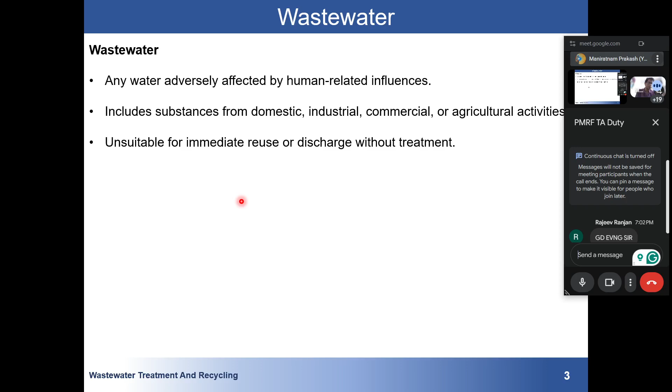So if we have any water that is contaminated from this kind of substance, that will be unsuitable for use, and either we have to treat it or we have to reuse it. That depends on our purpose, what we want to do.

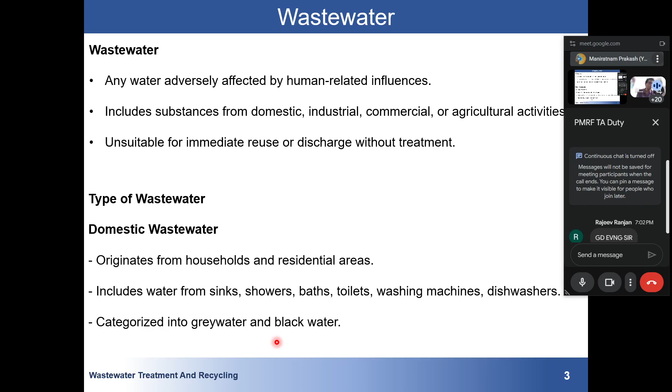Types of wastewater generally come from these sources. First is domestic wastewater, which originates from households and residential areas, including water from sinks, showers, baths, toilets, washing machines, and dishwashers. We categorize domestic wastewater into grey water and black water.

Black water is toilet waste, mainly containing organic carbon, nitrogen, phosphorus, and microorganisms. Grey water contains kitchen waste, bathing, and cleaning waste, mainly containing carbon, nitrogen, phosphorus, surfactants, salt, and dirt. Black water has a high amount of organic carbon, while grey water has a high amount of inorganic carbon also. Domestic water is the combination of both black water and grey water.

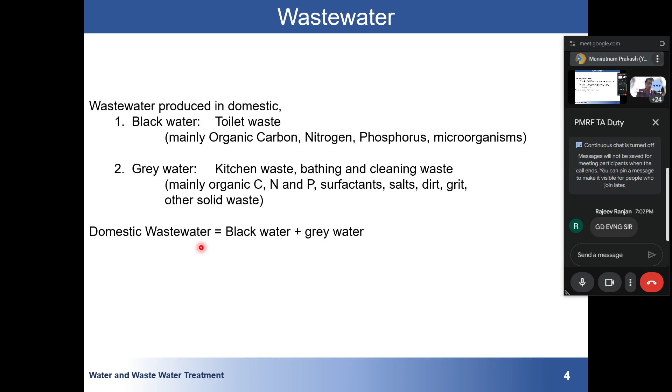These are just recap, so I will be moving on. If you feel I am going a little fast, you can stop me. I will explain in more detail, but these are the basic information - if you have gone through the lecture, you might be aware of these things.

Then we have industrial wastewater, generated from industrial and manufacturing processes. Depending on the type of industry, whether it is leather industry or dye industry, we will have different kinds of contaminants in our water, and that will also be considered wastewater that has to be treated.

Then we have agricultural wastewater, that is related to farming activities.

Then finally we have storm water. When we see lots of rain in our area, due to runoff from precipitation like rain and snow, this also generates wastewater - whatever silt or anything lying on the path of the rain will finally go into the river, canal, or nearby drainage system, and that also generates a kind of wastewater known as stormwater. Depending on the type of wastewater, we have different treatment policies and treatment methods.

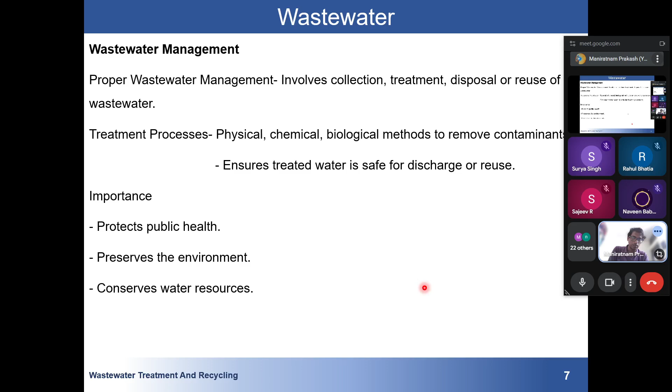So these few slides were about the basic things that have been covered in your lecture. I am hoping that if you are here, you must have gone through the lectures, so these were some basic recap. From the next slide, I will be showing you some questions, and I will give you very small time.

Inorganic carbon - so organic carbon, you know, can be easily degraded into some other form, while inorganic carbon remains. If you look at the basic difference scientifically, if carbon is in the oxidation state of plus 4, that will be considered inorganic carbon.

Are you getting what I am saying? Carbon has many oxidation states. If you look at the oxidation state of carbon, it can go from minus 4 to plus 4. So if you see any carbon...

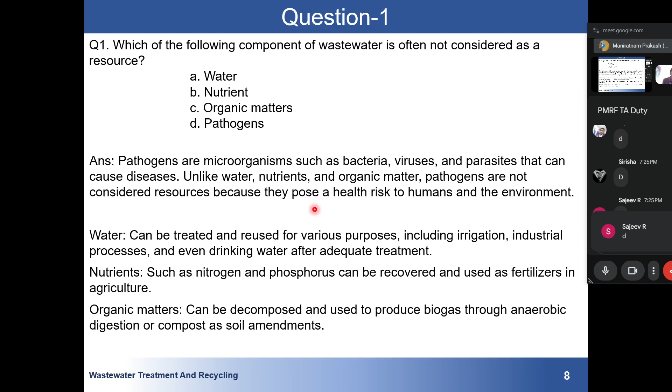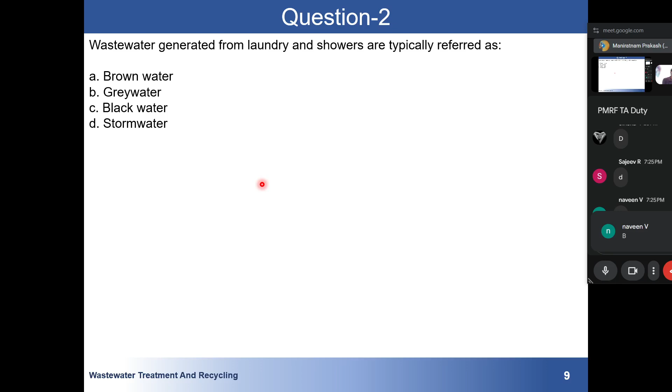Okay. Similarly, wastewater generated from laundry and showers is typically referred to as grey water. Yeah, yeah. So there is nothing called brown water in our system. Grey water comes from sources like laundry and showers.

So generally, remember one more thing: grey water and black water are also distinguished because of the carbon. Generally, grey water will contain a high amount of inorganic carbon, and black water will contain a high amount of organic carbon. The toilet waste, fecal matter, contains a high amount of...

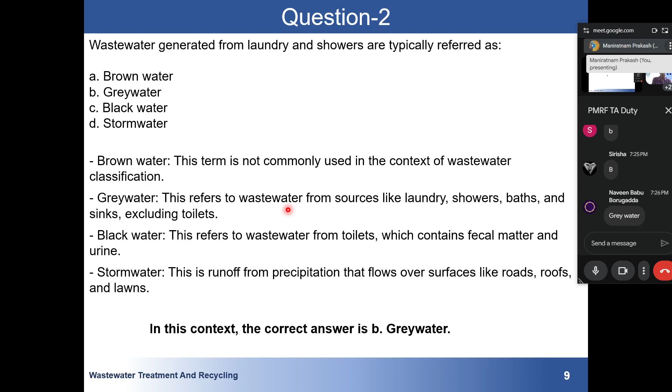I hope everyone is aware of different types of sources. We have point sources - meaning the wastewater is being generated at a particular point, such as industrial effluent, sewage treatment, or oil spill from a tanker. So that will be a point source. We can identify that source and treat it at that location only.

So we have non-point source, where you don't know the particular source. Generally, if you want to treat the point source, we can treat it easily because we know the source, we can directly go there, collect the water and treat it. But for non-point source, the treatment process is a bit challenging because you have to collect water from a very large area, like urban runoff, agricultural runoff, or atmospheric deposition. These pollutants come from a vast area, so the point of collection itself becomes very challenging, and that's why treatment also becomes challenging. But for point source, we know where the water is coming from, so we can directly go there and treat it.

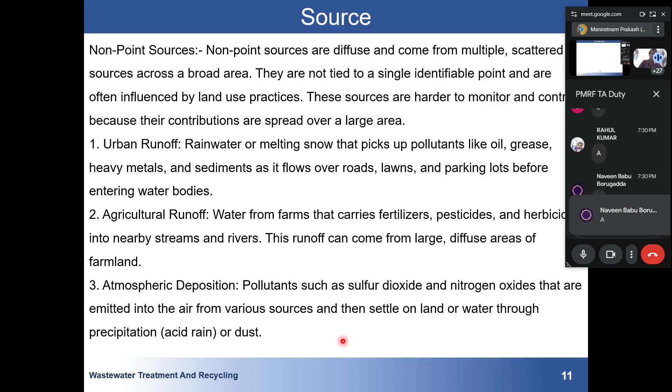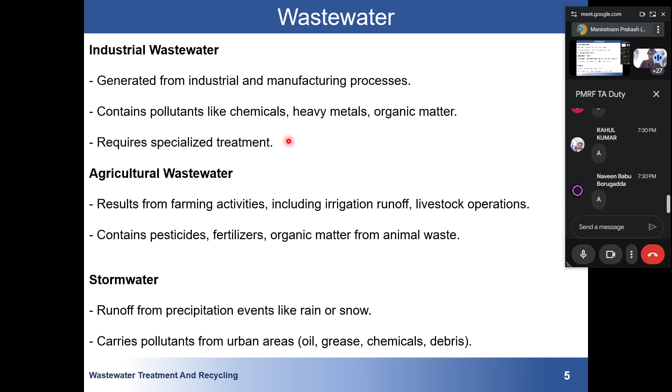So, regarding hazardous waste, if you talk about the management of hazardous waste, even your domestic water can be very hazardous, containing some hazardous components. Your industrial waste too—hazardous waste is a combination of many things. There is a separate topic on how to manage hazardous waste; it's a topic in itself, you cannot just list it here. So I have listed some waste here, like agricultural waste, storm water waste, industrial waste, and everything. But hazardous waste depends on what different components are in that wastewater. Depending on that, we decide whether it is hazardous waste or not, and the treatment is done based on that. So there is a separate course on hazardous waste.

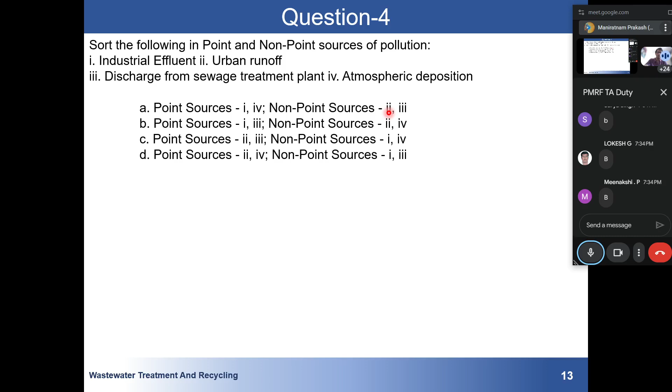We have option B. I think there are 24-26 people here, so I want everyone to participate. So B—first and third ones are point sources. If you have gone through the discussion, I pointed out that atmospheric deposition, like SO2 and NO2 coming into the water, is non-point. So yes, the correct answer is B.

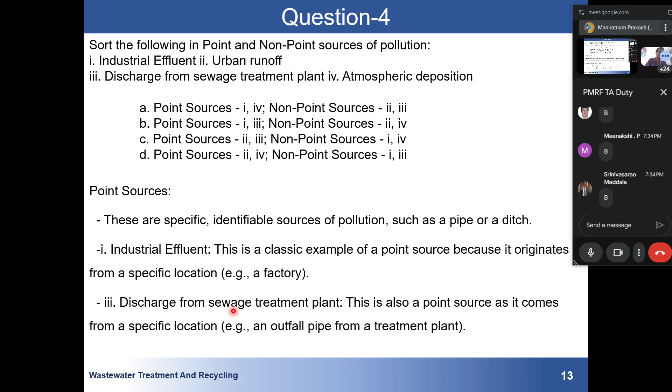Industrial effluent is the classical example—something coming from a factory, or something coming from the discharge treatment, that will be a point source. So whenever you look at point source and non-point source, think about the treatment also. The correct answer for non-point source is B.

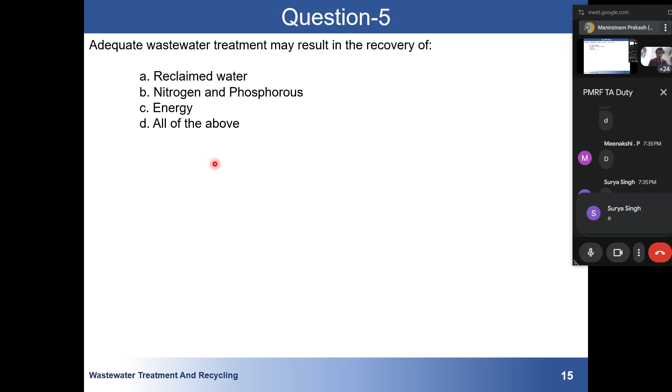Adequate wastewater treatment may result in the recovery of... All of the above. Option D is correct—all of the above.

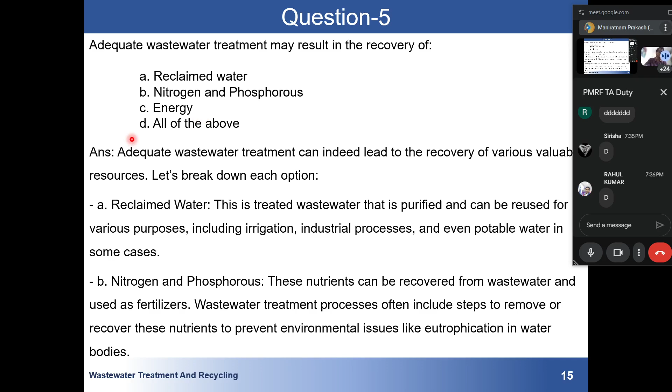We can reclaim the water, we can reclaim nitrogen and phosphorus, and we can reclaim energy also. If you want more detail on each option, you can go through the PPT. But briefly: we have to reuse our water, so we can reclaim the water. Many studies are going on for how to recover nitrogen and phosphorus, because these are reused for other things. And finally, wastewater contains sludge, which can be used to produce energy. So the correct answer is D, all of the above. The PPT will be shared with you.

How can sludge produce energy? Sludge is converted—basically it provides biogas which is used as energy. So sludge is converted, there is a mechanism where sludge is subjected to anaerobic digestion, and then that is converted into methane, and methane is used for energy. I think either in week 5 or week 6 we will go through sludge management, where it will be taught how this sludge is getting converted. For now, just remember the sludge is subjected to anaerobic digestion, then converted into methane, and methane is used for energy.

See the PPT. Someone asked, have you worked related to industrial wastewater in the past? Yes, last year I was the TA of industrial wastewater. So if you are asking about that, yes, I have taken the course of industrial wastewater also.

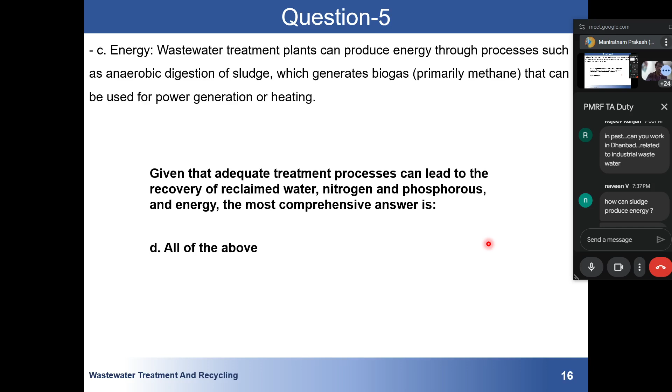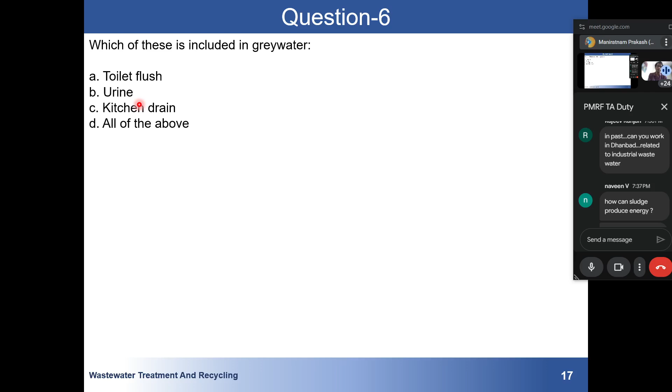Coming to the sixth question: which of these is included in gray water? You have to think about it—kitchen drain, option C. Whenever it comes to gray water and black water, I always think about the amount of organic carbon, and check which one will contain how much. The correct answer is C, because toilet water is considered black water, and urine is also considered black water. Kitchen drain includes wastewater from washing dishes and food preparation, so the correct answer is C.

Fecal matter will be considered as black water. It is part of black water—this water is considered black water because it contains fecal matter and urine. Yeah, you are correct.

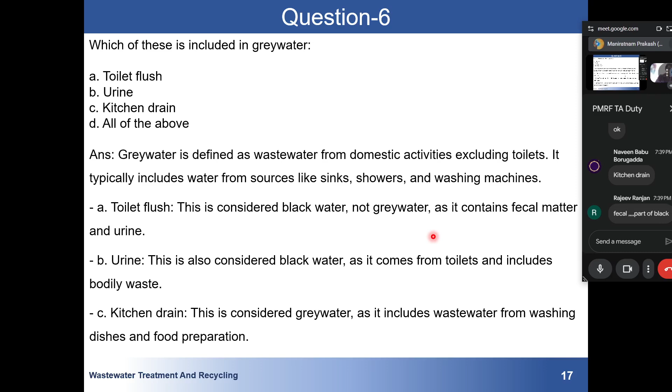Due to harmful pathogens and high carbon content, fecal material, also called human excreta, is considered part of black water. Some books use the term fecal material, others use human excreta—both mean the same thing. It's coming from the bathroom. I hope this is clear to you—Naveen Babu, you asked what fecal material is.

Some books use the term fecal material, some use excreta. Both are the same thing.

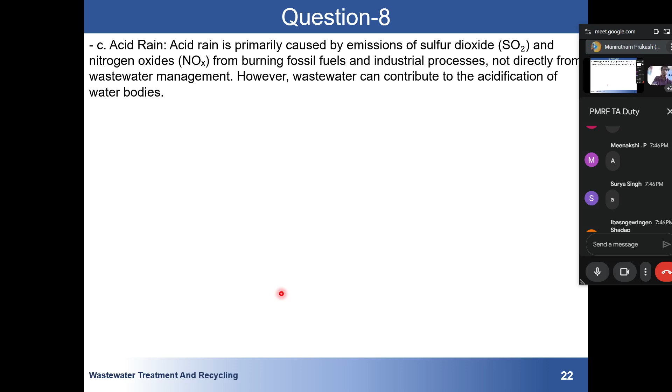First you should know what is eutrophication. It's like growth of algae due to some kind of nutrient, generally nitrogen and phosphorus, and wastewater contains high amounts of nitrogen and phosphorus. If that is not treated, it will cause eutrophication, but it cannot cause climate change. Anything can cause climate change, but wastewater can contribute to greenhouse gas emissions like methane, and climate change is more broadly related to a variety of sources, not directly. So it's not that wastewater is directly related to climate change, and it's also not related to acid rain. So the correct answer will be A, that is eutrophication.

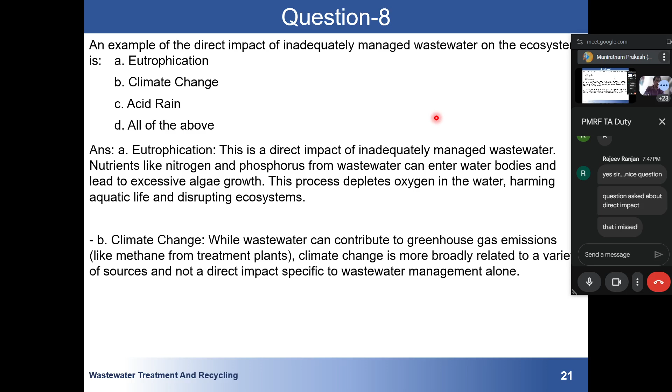The question was about direct impact. Like eutrophication will be, if you just discharge your wastewater, it will cause eutrophication. Okay, coming to the ninth question: which of the following is not a technique for wastewater treatment?

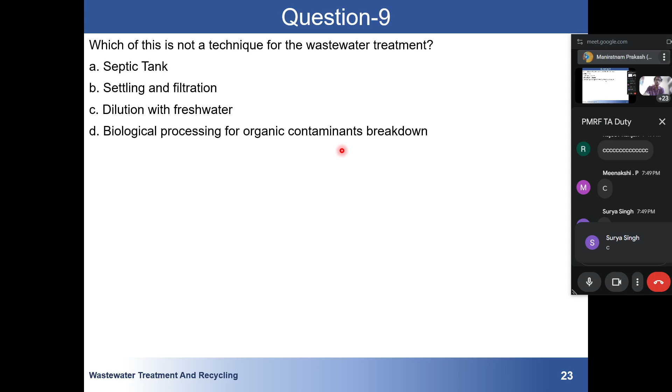Dilution with fresh water. Whatever questions till this are basic questions, we will be reading about these things in more detail in the upcoming week. So the correct answer is C, dilution with the fresh water.

There is a septic tank, which is a commonly used method for treating wastewater, especially in rural areas. It involves separation of solid and liquid, with microbial activity breaking down the organic matter, filtration, and settling. We will read about this sedimentation in detail in the upcoming week.

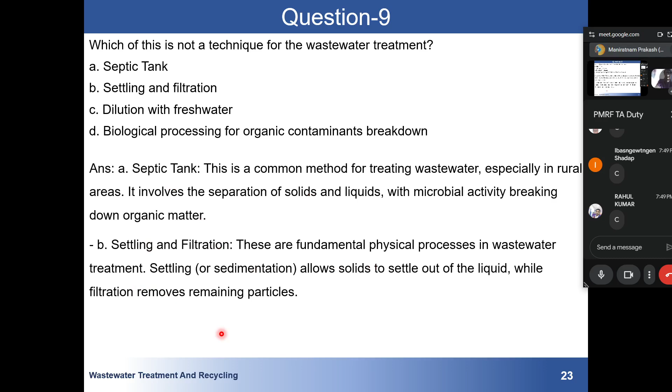Then we have biological process for organic contaminants. This is the key technique in wastewater treatment. We will be discussing biological treatment again, I think in week 7 or 8.

The dilution with fresh water is not generally a treatment technique but rather a method to reduce the concentration of pollutants. Generally, if any industrial wastewater contains a high amount of pollutant, people dilute their wastewater to decrease the pollutant concentration. But this is not related to wastewater treatment, so the correct answer is C.

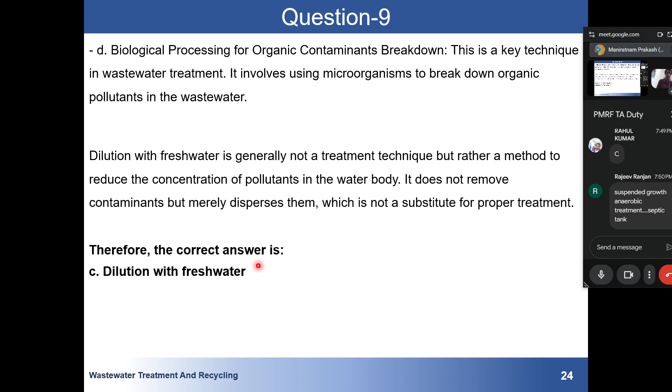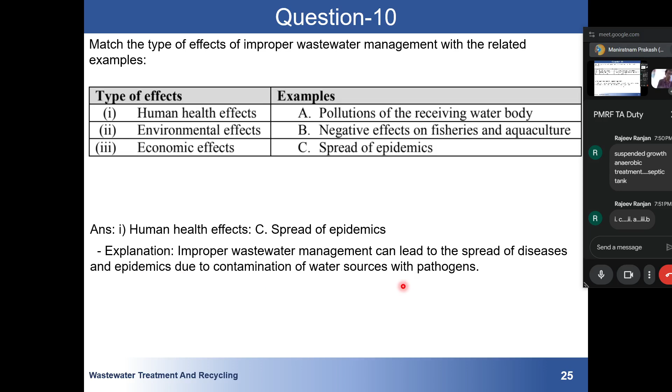Negative impact on fishery, environmental spread of epidemics. First will be matching with C: improper wastewater can lead to spread of disease and epidemics due to contamination of water bodies with pathogens. Then second will be matching with A: environmental effect includes pollution of water bodies which can harm aquatic ecosystems and biodiversity. And lastly, we have economic effect: negative impact on fishery and aquaculture, which can suffer from pollution-related issues affecting fish health and water quality. So the correct answer is 1C, 2A, and third B.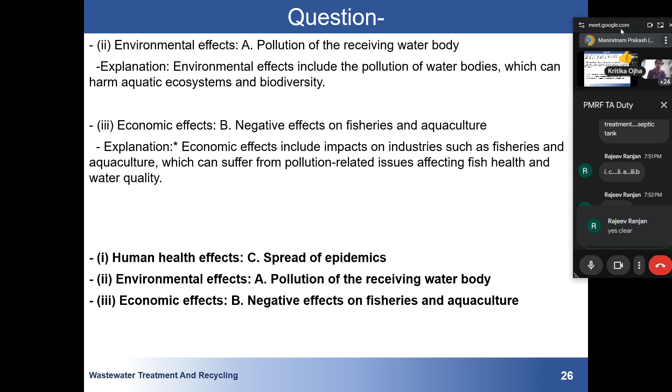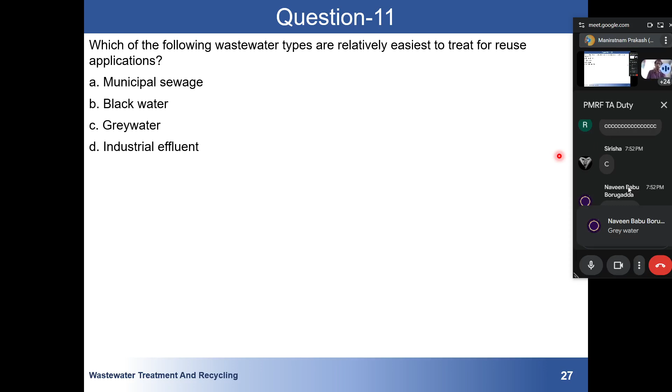Which of the following wastewater types are relatively easiest to treat for reuse application? Options are municipal sewage, black water, grey water, or industrial effluent. Someone has said municipal sewage, grey water - okay, everyone is saying grey water. Yes, the correct answer is grey water, because here I have also noted out the reason.

Municipal sewage contains a mixture of grey water and black water, making it complex and very hard to treat. Black water comes from toilets and contains high levels of pathogens and organic matter, making it difficult and costly to treat. Grey water includes water from sinks, showers, and washing machines, which generally has a lower level of contamination compared to black water, and it is easier to treat and can be used for applications like irrigation and toilet flushing. Industrial effluent contains a high amount of pollutants, so it is hard to treat. So grey water is the type.

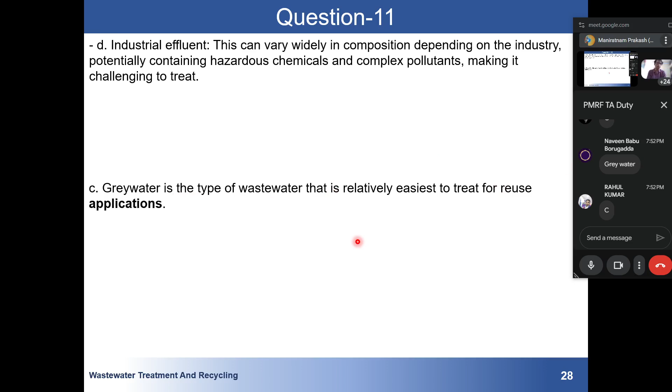Yes, everyone who said that grey water is very hard - it's actually very easy to treat.

Again, which of the following is the more adequate example of wastewater reuse in the environmental sector? Answer this question. Option A is discharge of treated sewage to agricultural field.

I have got two answers, A and C.

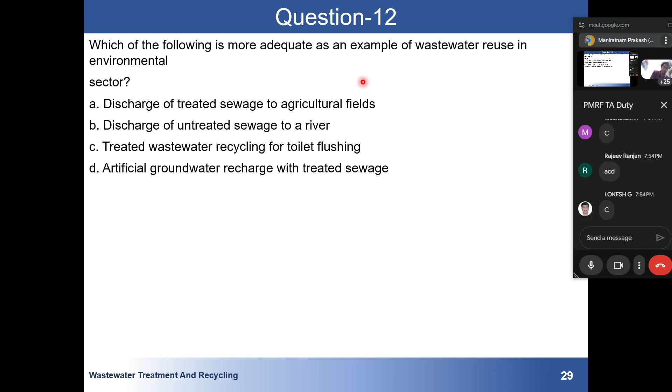Okay, so the correct answer is C.

Sorry, the correct answer, the best answer is D, artificial ground recharge with treated sewage.

No one has said D. I don't know why everyone is saying C. The correct answer is D. No one has said D. Only one person has said ACD, but you have to choose one. So I will go through one by one.

So in the environmental sector, wastewater uses, we have like... just 1 minute.

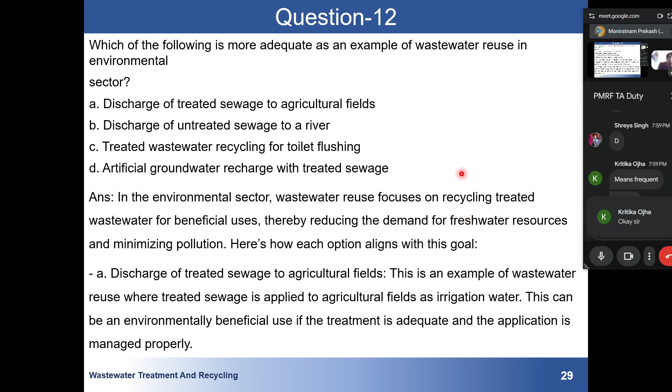So discharge to river, again if you are discharging your water to a river, the treatment should be very strict, and this cannot be used rather it becomes a pollution issue. Untreated sewage can harm the aquatic ecosystem and human health.

Then option C, everyone was saying C, that is treated water recycling for toilet flushing. This is a good example of wastewater reuse, treated water also known as reclaimed water, used for non-potable purposes, which reduces the demand for potable water.

And finally, the answer that I'm saying, the answer being given, is artificial groundwater recharge with treated sewage. This is also an example of wastewater usage. Treated water also replenishes groundwater supply, which can help sustain water management. So the question was also indirectly asking which option helps in a larger way, for a larger section of people.

So if your treated water is being used to recharge your groundwater, that can be used by many people. All the options here are examples of reuse of treated wastewater only. But out of these four options, if you talk about the environmental sector which can help many people, then that was option D - if you discharge your treated wastewater directly into the aquifer.

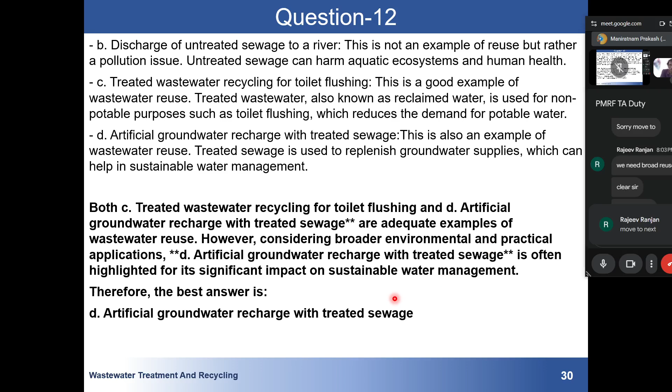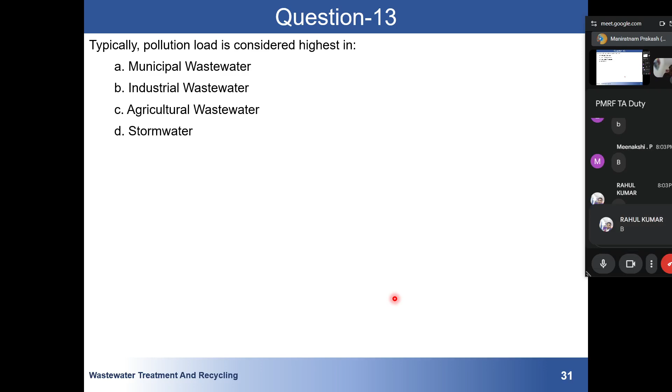Question number: typically pollution load is considered highest in which of the following - municipal wastewater, industrial wastewater, or agricultural? Option D... industrial wastewater. The correct answer is B, industrial waste.

Although municipal wastewater can have significant pollution load due to residential coverage, it generally undergoes substantial treatment before discharge. Wastewater treatment is designed for municipal waste because the waste coming in municipal sources is of domestic kind mostly, so its treatment is relatively easy. But industrial wastewater often has the highest pollution load, because industrial processes can introduce a wide variety of pollutants, including heavy metals, toxic chemicals, and high concentrations of organic matter. This diversity of pollutants is usually greater compared to other sources.

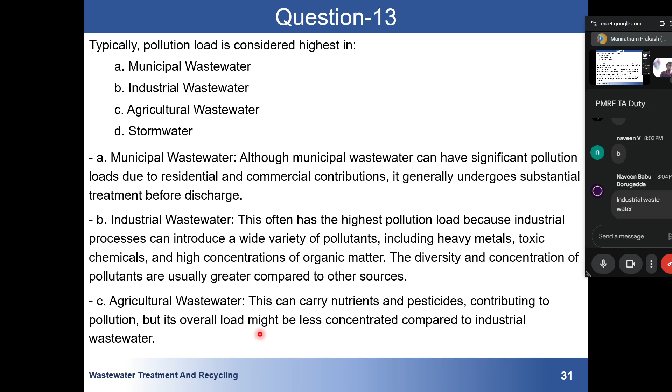Coming to agricultural wastewater, this can carry nutrients and pesticides contributing to pollution, but its load might be less concentrated compared to industrial wastewater. Storm water is simple rain water that typically contains dirt and similar things. So the correct answer is B.

Can industrial wastewater be discharged without treatment? No, you cannot - industrial wastewater is the most contaminated. For example, I am in Kanpur right now, and there is a lot of leather industry here, which is a huge cause of chromium contamination in most parts of Kanpur. In the past, people have thrown chromium-based water from tannery industries directly into the environment.

For treatment of leather, people use basic chromium sulfate salt, and that leads to high chromium concentration in groundwater, in wastewater, everywhere. The treatment method is also not that good. According to government policy, industries have to treat their water before discharge - they cannot discharge wastewater because it will contain high amounts of chromium, cadmium, lithium, and other contaminants. We have to treat that water and remove every contaminant coming from industrial sources. I'm giving the example of chromium.

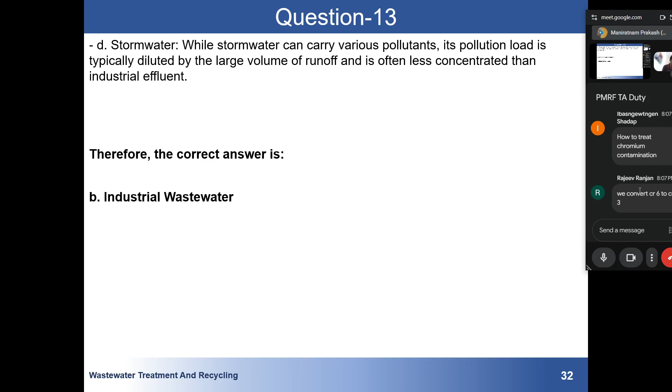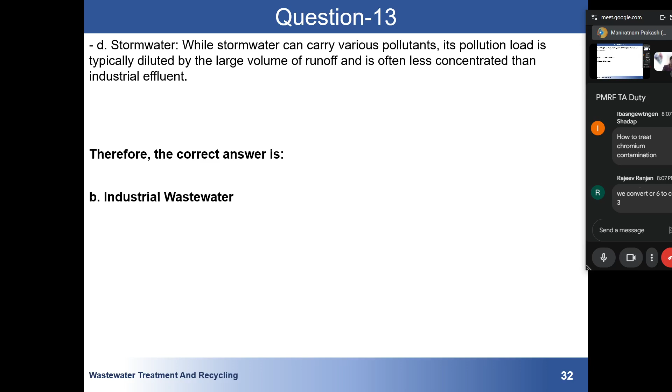If you want to discuss how to treat chromium contamination, we can discuss at the end of the session, including how we can convert chromium 6 to chromium 3, and then we have to remove chromium 3 and all this. We can discuss this at the end of the session.

Coming to the next question: which of the following India central government programs include wastewater or grey water management as one of their components? We will discuss the chromium contamination topic at the end. Let's go to the next question.

D. All of the above. A. Swachh Bharat Mission. B. National Mission for Clean Ganga. The correct answer is...

The correct mission is Swachh Bharat Mission, option A. Clean Ganga is just for cleaning the Ganga - this mission focuses on conservation and cleaning of the Ganga river, including wastewater management, treatment, and schemes. Jal Jeevan Mission is to provide safe water. But Swachh Bharat Mission aims to provide sanitation and manage wastewater and grey water as part of enhancing public health and sanitation facilities. I don't know why everyone is saying B.

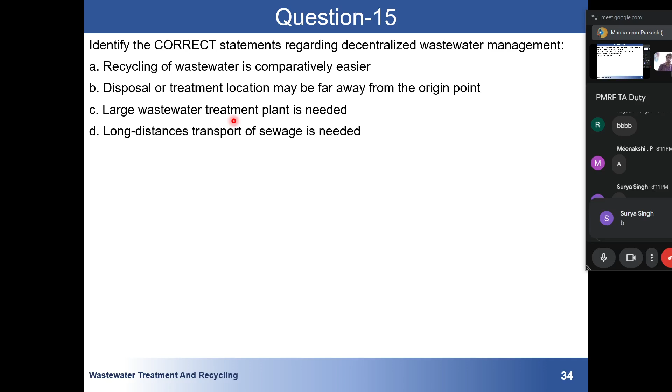Option D: decentralized and centralized, long distance transport of sewage is needed - is that correct? I have got one. I don't know if this is for this question or the previous one. A: recycling of wastewater is comparatively easier. Disposal or treatment location may be far away from the origin point. Large wastewater plant is needed. Long distance transport of sewage is needed. I have got answers A and D. Any more answers? B. A, B. The correct answer is A.

First, do you understand what is decentralized treatment and centralized treatment? Can anyone say what centralized and decentralized treatment are? Sir, in decentralized wastewater management, there are multiple wastewater treatment plants, both far away from one another. Whereas in centralized wastewater management, there is a single wastewater management system which is large in space and easy to operate. We were told this in previous sessions.

Decentralized means a few houses have their own STP, like a septic tank, and centralized means a common STP - correct. So the question was asking what is the correct statement regarding decentralized wastewater management. Decentralized wastewater involves treating and managing water close to its source rather than relying on large centralized treatment. In centralized treatment, there is one village and everyone passes their wastewater into that treatment plant and it treats it. But decentralized means you construct something near your area, near your house - maybe four or five houses come together and make something to treat their wastewater together. So it's just smaller scale.

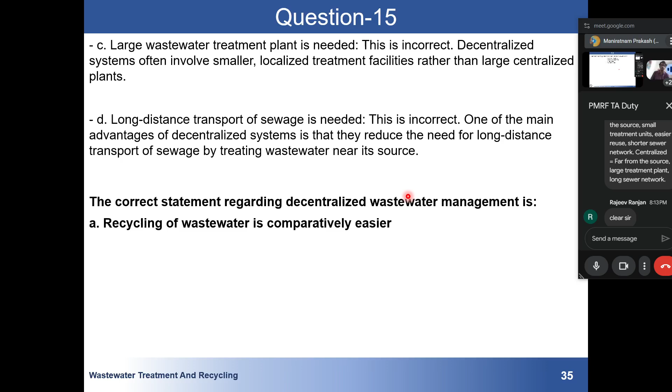Okay, now let's go again - we have 40 questions, I have the last 10 questions left. Just answer this question. Option A.

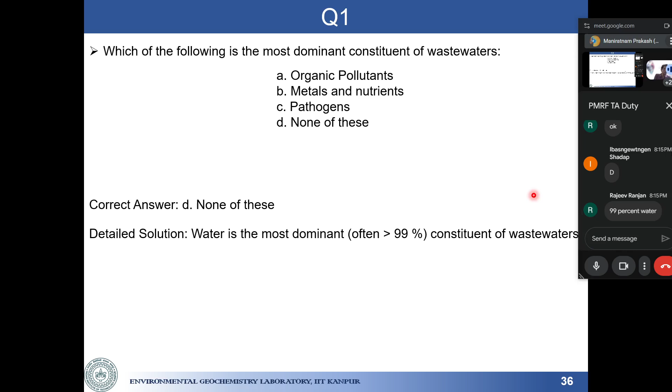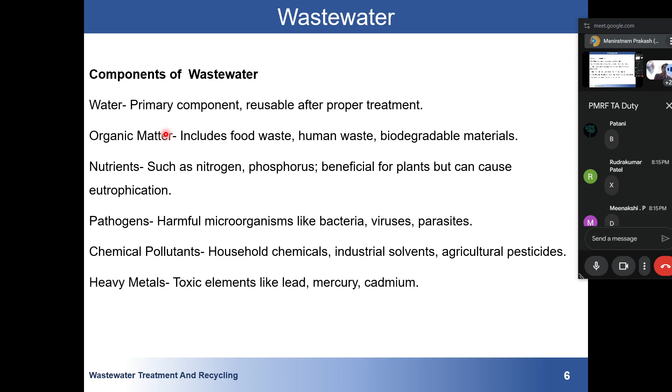Those who are saying A, you are wrong. I don't think I was - when I was discussing this slide on components of wastewater, I said water is the main component. This is a very genuine mistake, everyone makes this mistake. I was discussing with one person who was going through an interview, and this question was asked to him - he was in a CPCB interview - and he was not able to say that water is the main component of wastewater. But for you guys also, I discussed this half an hour ago, and still you are saying this answer.

Keep this in mind: if we are talking about organic components, they might be high, metal might be high - I cannot focus on that. It's okay, but next time, whenever you are talking about wastewater, the first component that should come to your mind should be water. Other things can be high or low, you don't know. Wastewater can contain high amounts of organic matter, but it will always be less than water.

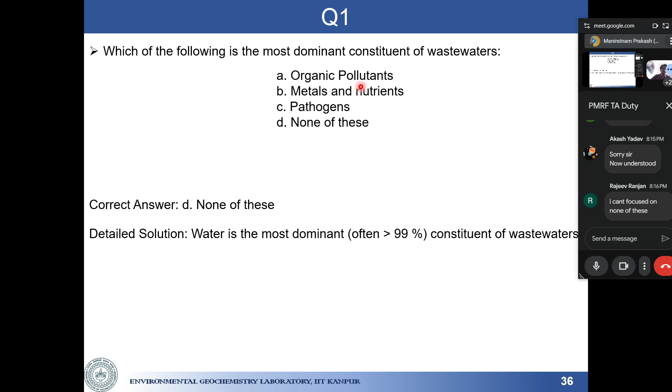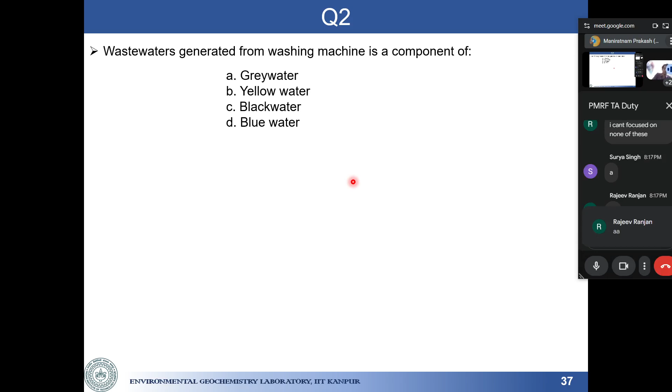Wastewater generated from a washing machine - again this is a recap. So the last 10 questions will cover all the questions from the week one. Grey water is the correct answer. Grey water includes wastewater from the kitchen, laundry, and showers.

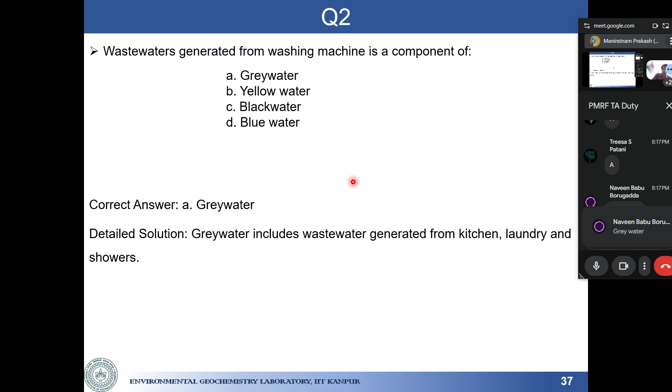Question 3: Recycling wastewater is a sustainable approach for wastewater management. Wastewater must always be treated to meet drinking water standards before reuse or recycling. Option A. Please answer this question everyone. If you are talking about high standards, drinking water requires an advanced level of treatment, so it is not always required - if our aim is to discharge it, then we don't have to treat it that much. So the answer is A.

Statement 1 is correct, while statement 2 is wrong - wastewater may be treated as per the requirement of planned reuse or recycling. How much we are going to reclaim it depends on them. Yes, correct.

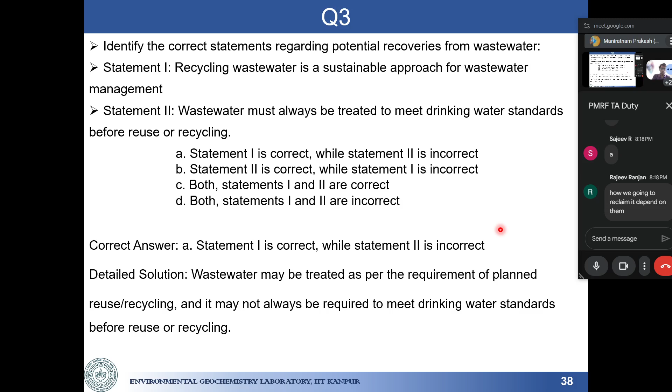Question 4: Non-point pollution sources are... we have discussed point source and non-point source before. Options are D, A, C. We have got answer D, C. Easy to monitor, difficult to regulate.

Those who are saying D, I don't know why. The correct answer is C, difficult to regulate. We don't know - agricultural runoff, stormwater - we don't know which kind of pollutant is coming, so it is very difficult to regulate that. C is the correct answer, yes.

Non-point sources are comprised of many small sources from different locations, therefore difficult to monitor even though individually... So this is the second or third time I think you are saying you missed something. Read your question properly, then go for the answer. It's okay, but you have to learn from your mistakes - last time also you said you missed this. So don't be in a hurry, we have a lot of time.

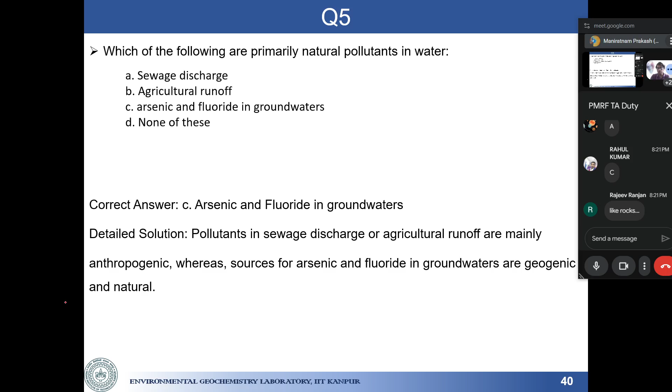So there are different conditions, like rocks. I can briefly explain how fluoride is coming into water. The main reason for fluoride to come into water is this mineral. I can show you one card. I don't know if we have time, but I will show you how fluoride is coming into the groundwater.

Are you able to see my screen? Yeah sir, yeah yeah.

So here you can see that in our groundwater we have calcium, magnesium, carbonate. Suppose the temperature of the system rises, then water will evaporate. When water evaporates, only water evaporates but the ions remain in the water, so calcium, magnesium, carbonate will remain in the water. Once the water evaporates, the amount of water will decrease, so the concentration of calcium, magnesium, and carbonate will start to increase.

So what will happen? There is something called saturation index. The system has become saturated with these minerals, calcite, dolomite, so it will start precipitating. As it precipitates, there will be a deficiency of calcium in the system. Remember, the system will always try to be in equilibrium, trying to maintain the amount of calcium it has.

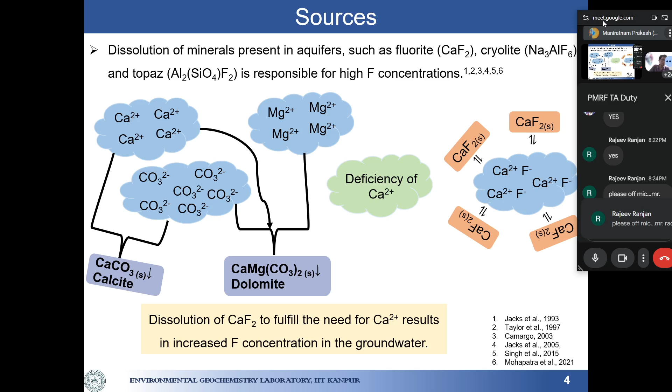Did you understand what I said? Did you get what I was saying? So, dissolution of...

Sir, are arsenic and fluoride always occurring together or not? No.

Have you heard of the smelting industry? It's an industry where aluminum is manufactured, extracted from the ore. Aluminum comes from minerals like cryolite or topaz. These also contain some amounts of fluoride in their mineral form. So wherever these minerals are extracted, the water also contains some amount of fluoride.

So those fluorides are anthropogenic fluoride, because they are not coming naturally from this kind of process. People are extracting aluminum, and in that process some fluoride is also coming.

Similarly for arsenic, most of the arsenic is natural. I don't have the presentation for arsenic, but my group works on arsenic contamination, and the reason is somewhat similar - there is a deficiency of something, so to fulfill that deficiency, some mineral will start to dissolve, and with the dissolution of that mineral, arsenic will come into the aquifer. I hope you are getting what I am saying.

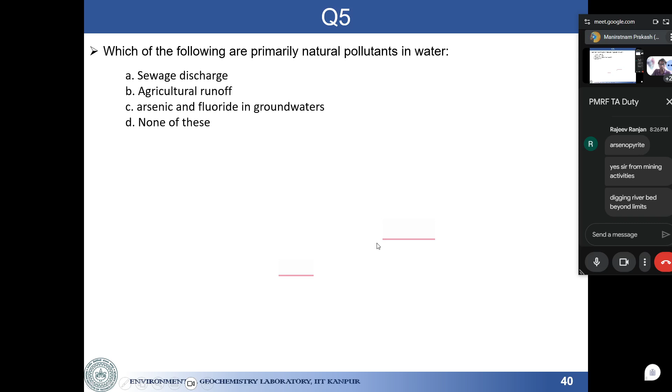Municipal wastewater may be treated by - I think this was already discussed. Option B answers this question, similar to one already discussed with you. The correct answer is B. There is physical separation, biological and physical treatment - primary treatment, secondary treatment, advanced treatment. These are some of the treatment methods. So municipal waste may be treated by a combination of physiochemical and biological units.

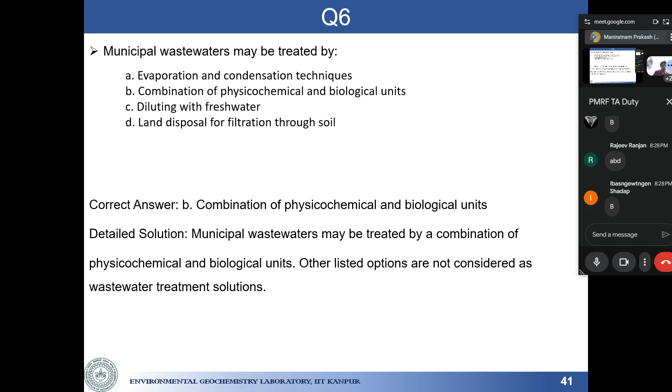I hope this is clear. Just one minute.

Huh, so this is clear. B is the correct answer.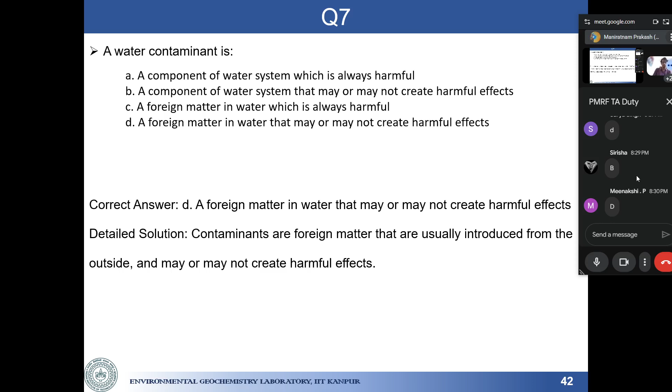A foreign matter creates harmful effect - correct answer is D. A foreign matter in the water that may or may not create a harmful effect, and if the concentration of this contaminant exceeds a certain limit, then it converts into a pollutant. So remember this difference between contaminant and pollutant. I hope this is clear to you.

Match the following. Everyone answer this question. Option C.

C, C, C. One - agriculture rich in nutrients. B - industrial effluent. Yes, the correct answer is C: 1C, 2B, 3A. Municipal wastewater often has many pathogens. These are a recap of what we have discussed.

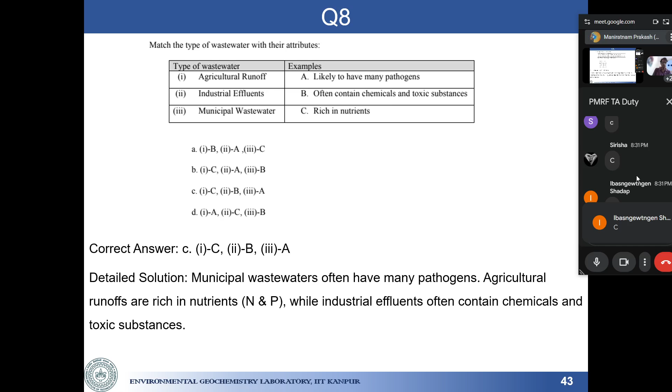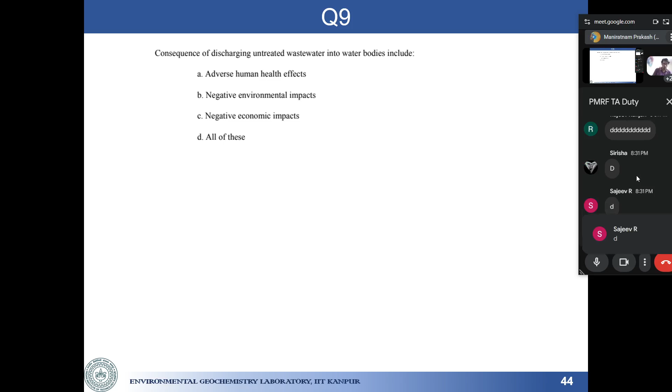Question number 9: consequence of discharging untreated wastewater into water bodies include - D, all of the above. Yes, the correct answer is D. Obviously, if you discharge untreated wastewater, it can cause harm to human health - like if you discharge it in a river being used by humans for bathing, it will harm us. In terms of environmental effect, it can kill fish and so on. We have also discussed the economic impact.

So, correct answer. Last question of the day: which one of the following is not a major issue in wastewater management? Everyone, please, this is the last question - I want everyone to answer this. Not a major issue in wastewater management: lack of public awareness, lack of suitable technology, lack of financial resources, or lack of political will.

We've got A, D, A, A. Not a major issue - lack of political will, option D. The correct answer is B. Why is everyone saying political will is not a major issue, and everyone was saying public awareness is not a major issue? They are asking which is not a major issue. Why are you saying D?

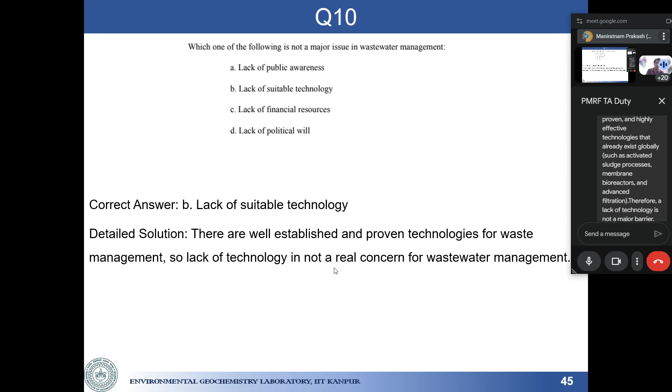What you are saying is good, but understand that certain countries have certain technology we are not adopting. That's all. People are not aware, political people are not aware. We have lack of funding and all these things, blah blah blah.

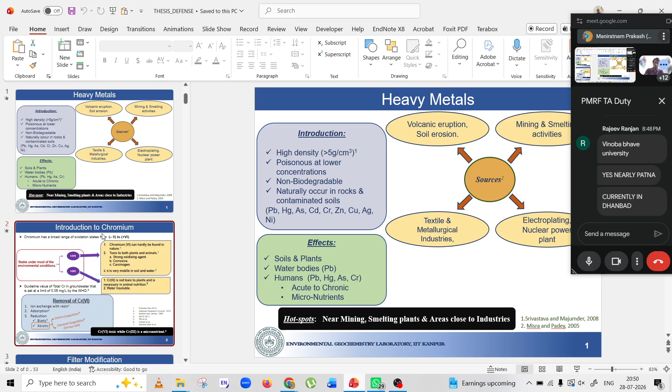So for treatment of chromium, can you...

Can you see this slide? Those who were asking about how to treat chromium, generally chromium exists in chromium 6 form. So what do people do now?

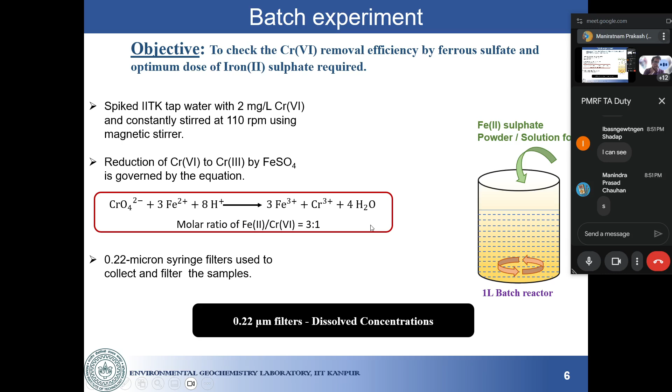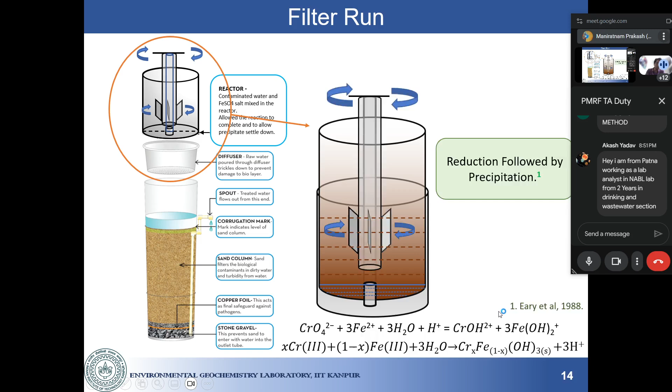We will take chromium contaminated water, add ferrous sulfate to it, then mix it for some time. So what happens is this chromium 6 gets converted into chromium 3, and iron 2 gets converted into iron 3, and these two again mix and form one kind of precipitate, a black precipitate. So once the black precipitate forms...

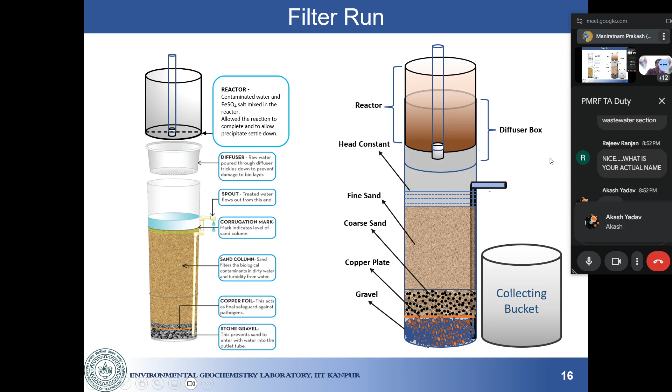So in this way, with the help of iron 2, we treat chromium, generally this is the method. And similarly, for treatment of arsenic...

For treatment of arsenic, generally people use ZVI, that is zero valent iron. So chromium is removed with the help of precipitation, co-precipitation, we are precipitating it, and arsenic is removed with the help of adsorption.

So I can share with you some papers where you can see how. You can go through this paper and see this.